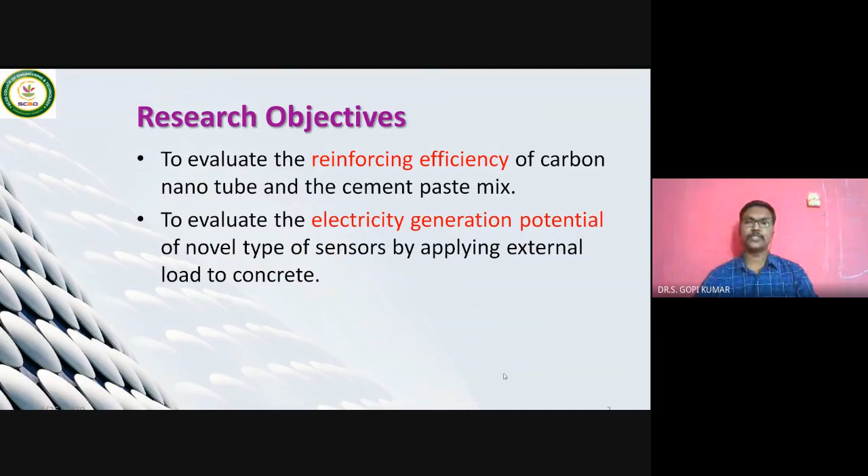Nano adapted sensor. As smart materials are artificial man-made intelligent material leading the world in every sector. Effective utilization of nanomaterial are still motivated for application in the field of construction industry. The sensing, conducting, and self-control properties are dominating when nanocomposites are adapted in cement concrete. The durability of the nano-based concrete composite materials are consistent.

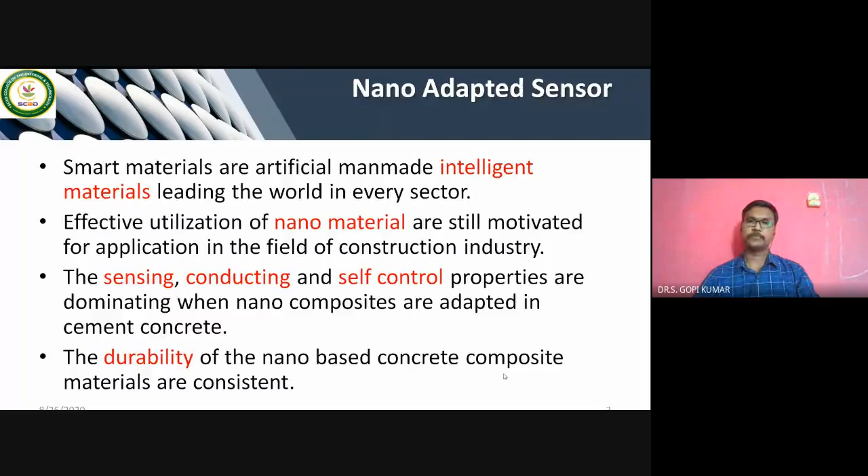Nano concrete smart material. As we are familiar that cement is a little conducting component by nature, and cement and carbon nanotube in a combination acts as a composite material with multi-facility application. Electromagnetic protection dominates with the support of mechanical and chemical properties. Conductivity property is developed with the support of carbon nanotube electrons, thereby electric percolation threshold is maintained for successful conductive system.

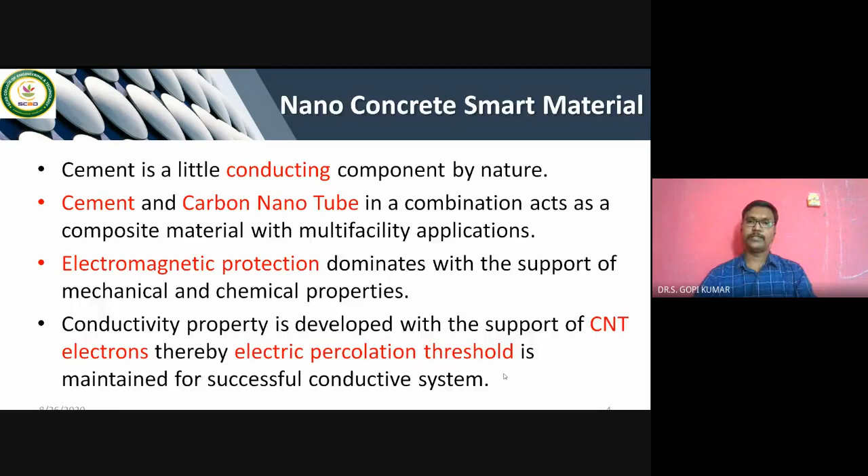Methodology: number 1, theoretical assessment on finalizing the mix ratio. Number 2, casting and curing for experimental work. Number 3, testing of sample for deserved application.

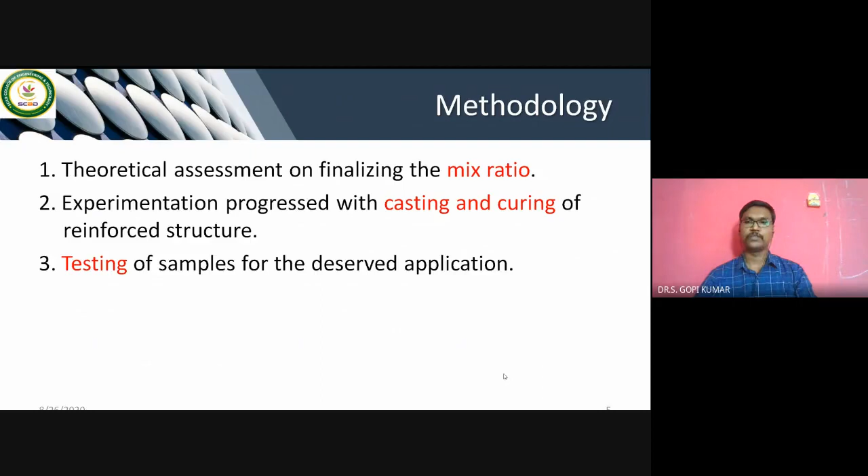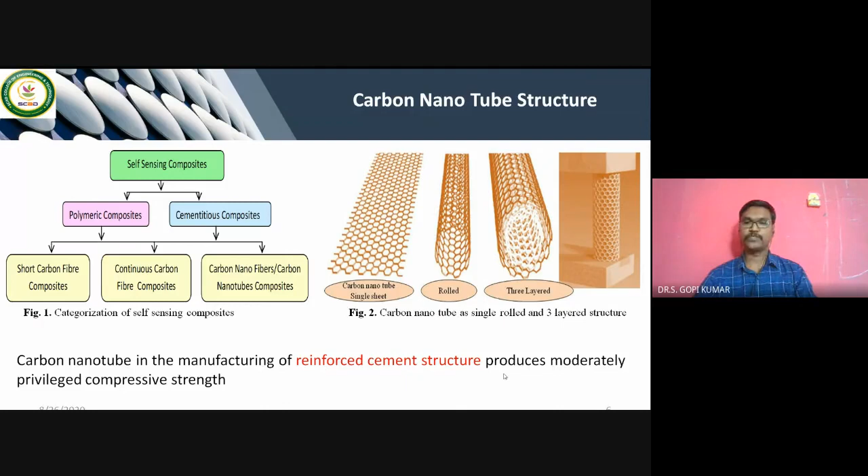Now, about carbon nanotube structure, where it is self-sensing composite. It is classified as polymeric and cementitious, where short carbon fiber, continuous carbon nanofibers are the subclassifications, where carbon nanotubes are in the form of single sheet rolled and 3 layered structure, where this carbon nanotube in the manufacturing of reinforced cement structure produces moderately privileged compressive strength.

And amount of carbon nanotube and cement based composite weight percentage, where various literature work were presented in this slide, where the strength, compressive strength and flexural strength for varying carbon nanotube cement percentages represented here, and the highest compressive strength 19% is observed with 0.5 percentage CNT and cement weight percentage, where the mix ratio is mortar, and similarly flexural strength 25% higher compared with control is observed.

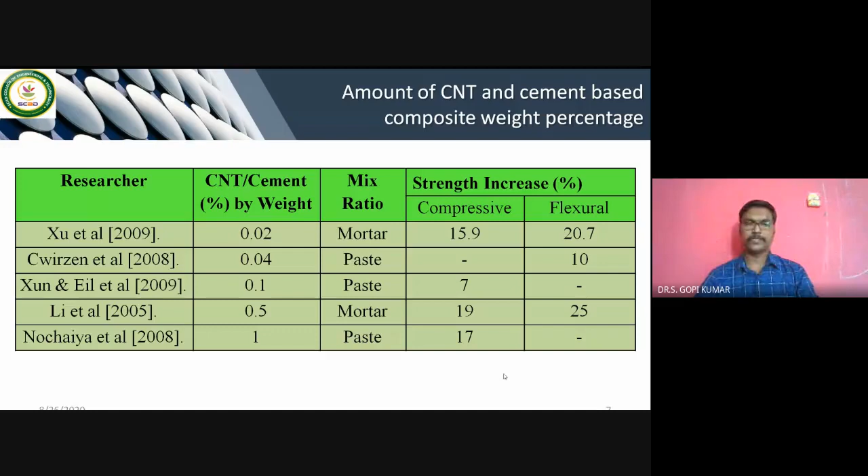And with this literature, our work have been focused, where the carbon nanotube and cement percentage were categorized as control, 0.2, 3.0 percentage, 4.5 percentage, 6.0 percentage, and the amount of carbon nanotube used were the respective grams, where for 6 percentage 120 grams were used, and 90 gram for 4.5, 60 gram for 3.0 percentage, and 4 gram for 0.2 percentage. And for rest of the component, cement, water, recycled lightweight clay aggregates were displayed.

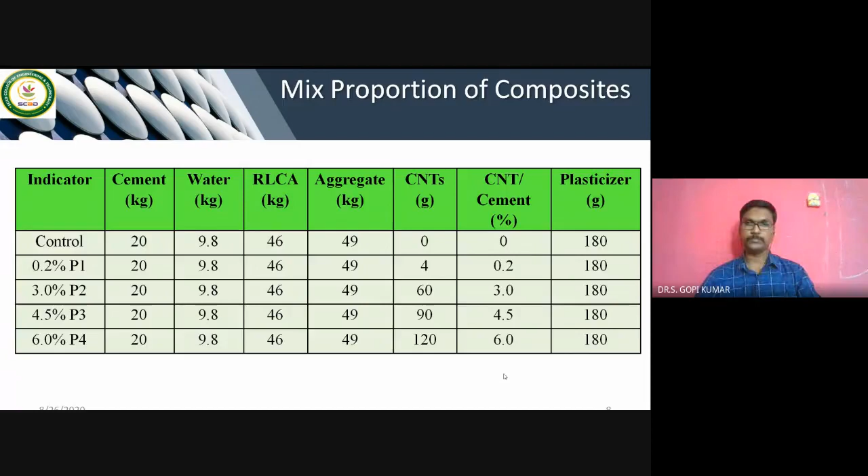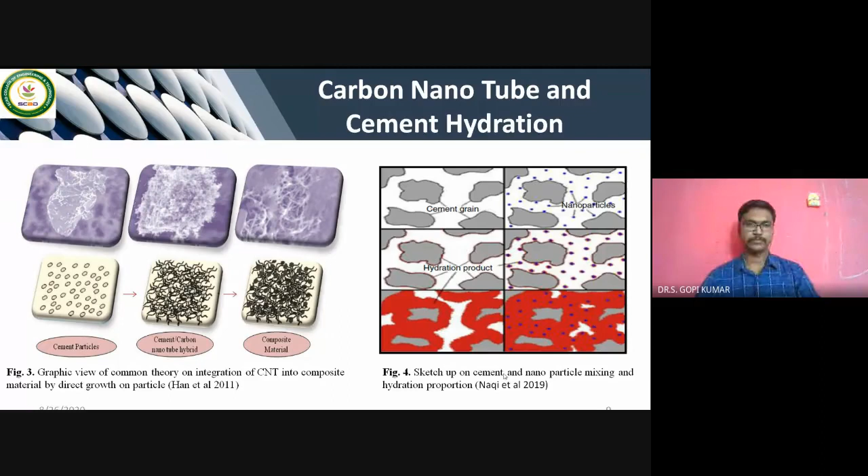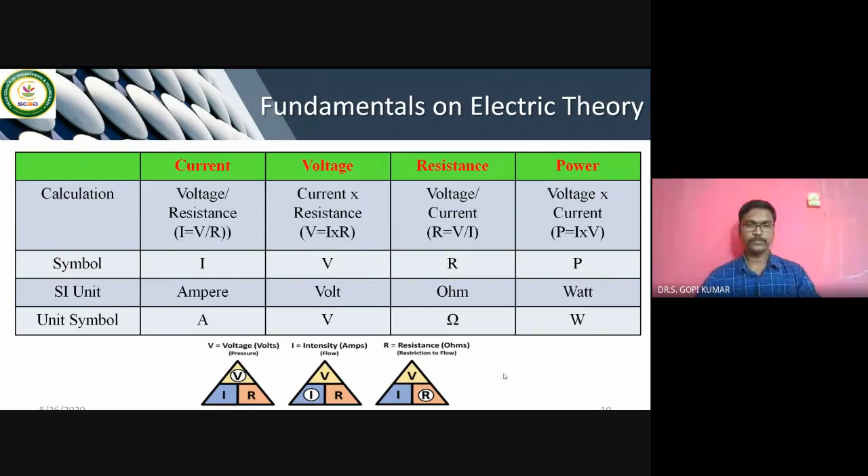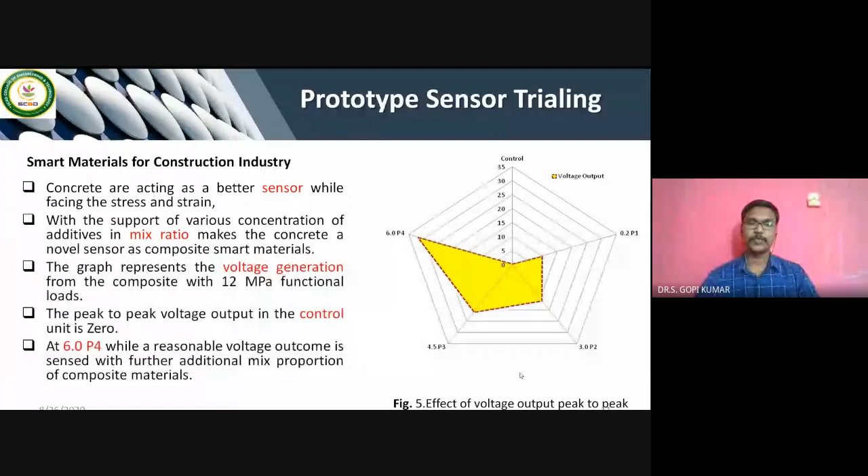Now, prototype sensor trialing. In this case, the voltage output is monitored, where the graph shows effect of voltage output peak to peak ranging from different composition, where in control the voltage is nil, where for 0.2 percentage, 3.0, 4.5 and 6, it shows higher voltage power flow for the largest amount of carbon nanotube and cement composition, where this experimentation is carried out with external load for 12 MPa.